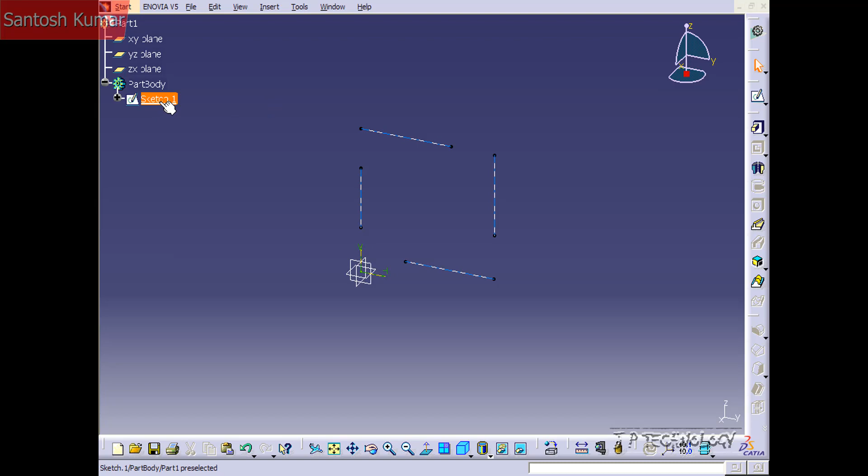To start off, open up tutorial part number 18, which is located on the DVD. Once you have it loaded, let's go into the sketch. So let's double click on the sketch, and now we're into it.

So what we're going to do in this tutorial is go through the trim extend features within CATIA V5. These are the trim features you're able to choose from, so you're able to delete an entire section or break it, it's up to you. The tool I'm going to specifically focus on in this tutorial is the trim. What I've done here is set up some lines, and we're going to trim and extend these lines to make a square.

To start off, let's click on the trim. To use the trim, you click on a line, then move it, and it's going to move one of the points up and down until it touches. Let's trim this line and make it touch that line there. Let's click this line, and you can see we're now able to move it up or down. We want it to go to that point there. To make it go just at that one point, we're going to highlight this line here. Now it's in line with it. Click, and now it's in line.

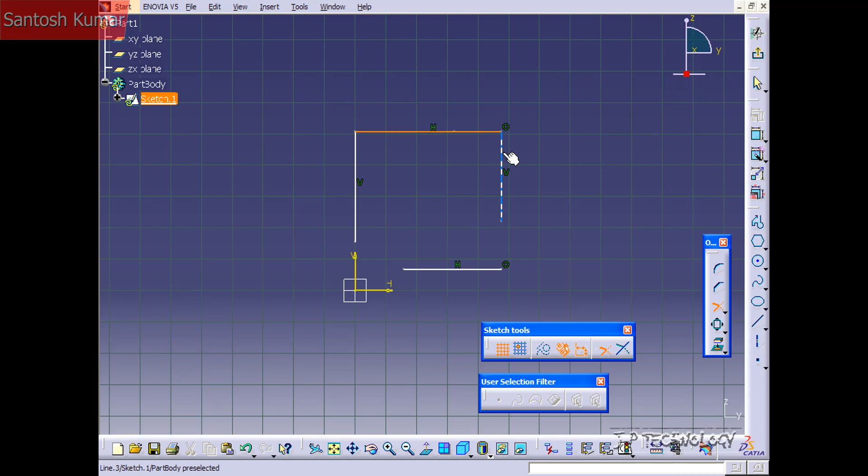So now let's keep going around and finish the square. We'll make this in line with that. Make this one in line with this one. And let's make this one in line with that one there. And now we've made our square.

So being able to trim different edges and whatnot is a very powerful tool in here. You're able to piece together sketches and then trim and extend everything until they complete a whole profile. So I'm going to show you another one.

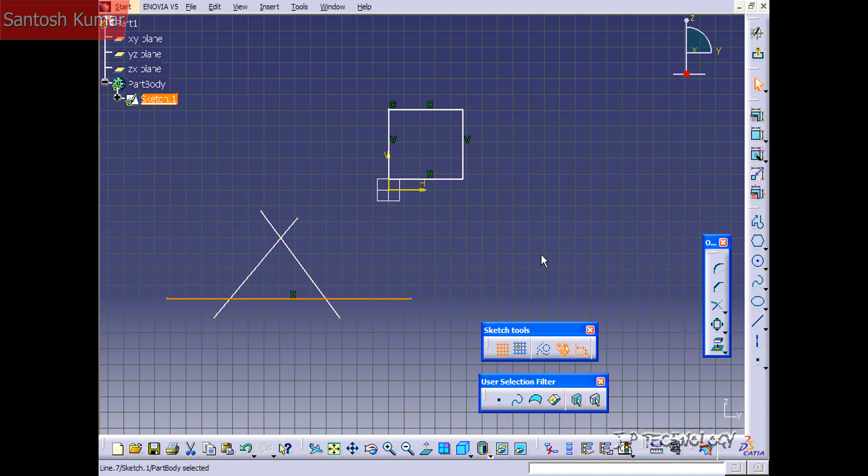So I'm going to make a few lines, and we're going to make a triangle. What we're going to do in this one is trim them. In the last one we extended everything; this one we're going to trim the edges. So let's click trim, and what you have to do is click on the side that you want to keep. In this case we want to delete this side and keep this side.

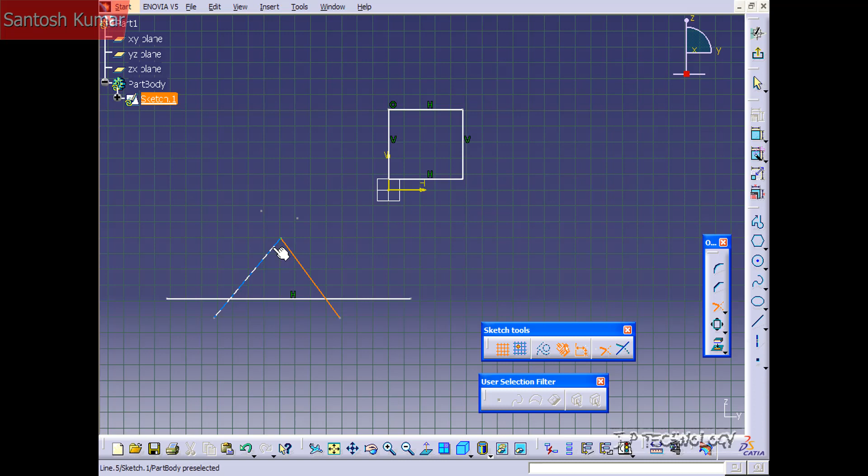So let's click right here and bring it up to that line. As you can see, it's deleting that other line there, so you have to move it around until you get the result you want. We want both of those at the top to be gone, so bring it to the side there, and now we've got both. Now let's do the same to the bottom, and let's keep this side here, and we'll trim this one here too. And now we've got our triangle.

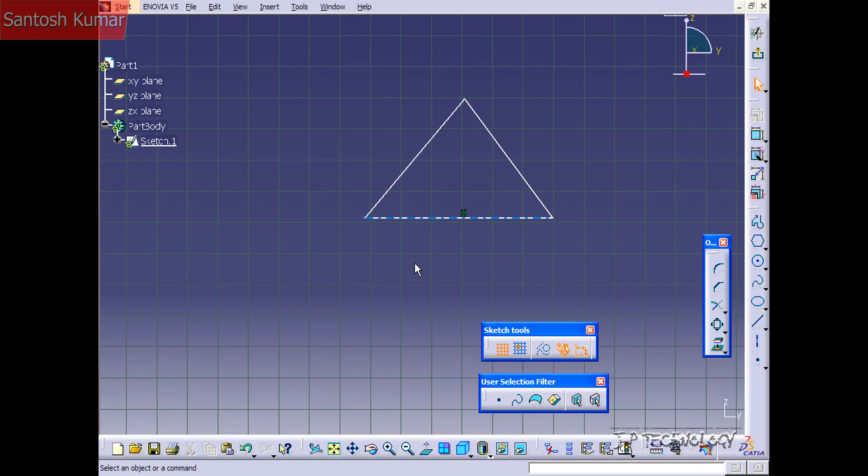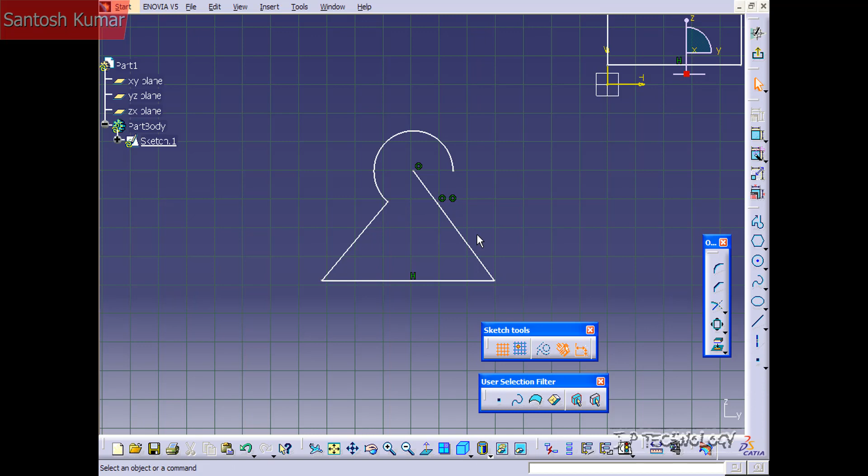Now let's take the circle and put it on the top of the triangle here, and just pull it out a bit. Now let's try to trim some of these edges so that we have just a single profile. Let's click trim. We want to keep this side, so we'll pull it up to there. And we'll do the same to this here, bringing it around until it touches there. And now we've trimmed those sides.

Now this is a great tool, as you're able to piece those together and make the profile. If I wanted to do this independently, I would have to do a 3-point arc and slowly build all these together. With the trim, you're able to throw all the objects in there and then start trimming away the excess. So the trim tool is a very, very powerful tool.

The more you play around with it, the more you'll know. You just have to use it to learn and to know when to use it. So it's a great tool, and it'll help you put sketches together quicker, easier, and get the results that you want.

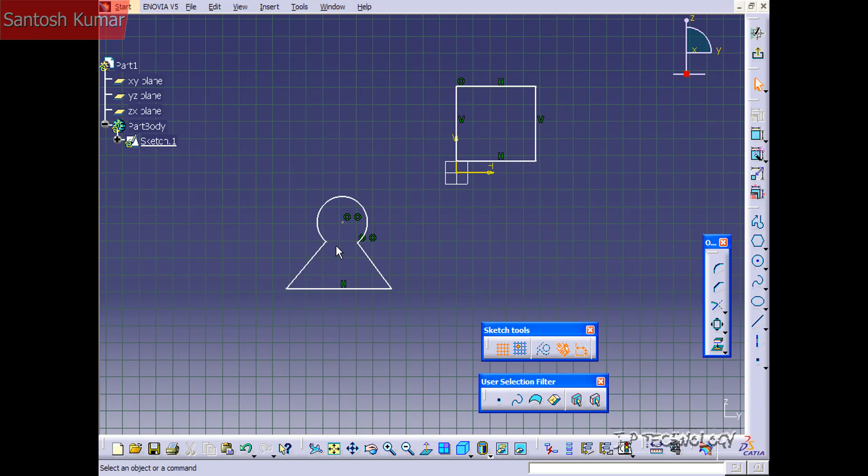And this concludes our tutorial on how to use the trim extend sketch feature within CATIA V5.